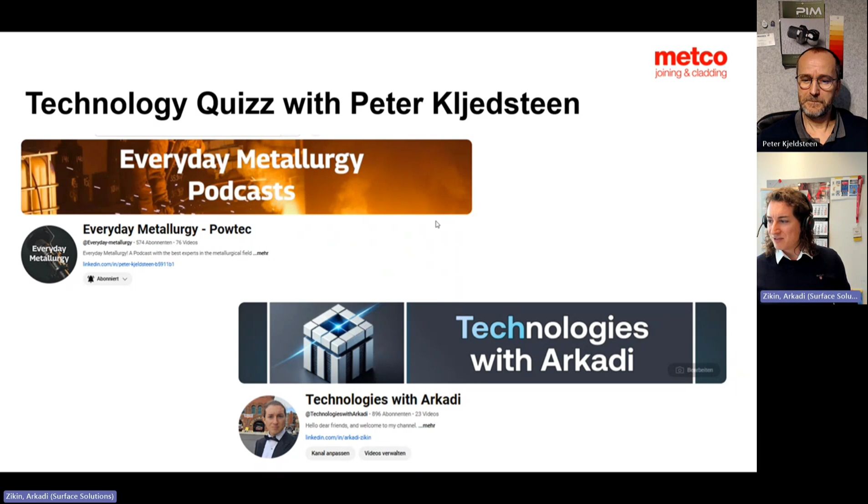That's why if I look at today's quiz, I want you to tell me: what is powder metallurgy? Yeah, that's a good one. Powder metallurgy started many years ago. It was the only way you could make products in alloys that had such a high melting temperature that you could not melt it. A classic example is materials made of tungsten - you're not able to melt tungsten products, so you have to produce it powder metallurgically and sinter it.

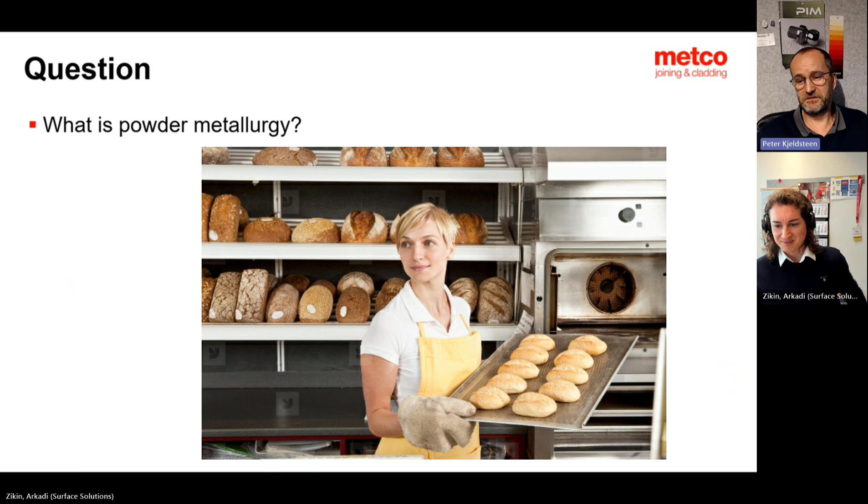In basic terms, I often use the picture of a bakery, because in a bakery you have the flour, and in a powder metal plant you have the metal flour. With that you can make different kinds of breads, and you can also make different kinds of metal components. So if you one day want to make stainless steel, you can do that. You can make traditional carbon steel, you can make different alloys - copper, aluminum - and some of these very special high temperature materials are very common, as well as electrical steel. And some of the funny things, magnets, are always made with powder metallurgy routes.

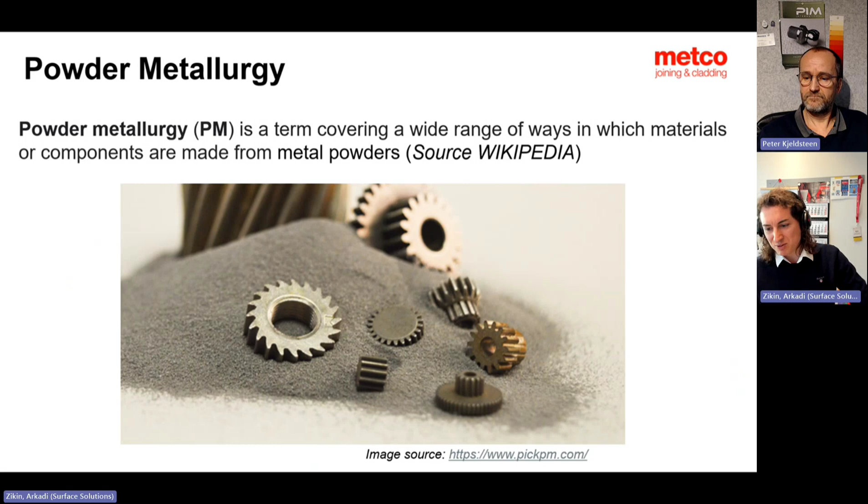Yes, because you improve the magnetic properties of materials by that. When I was preparing this for you, and honestly also trying to answer the question myself - what is powder metallurgy? - I haven't found anything simpler than a Wikipedia definition, which covers a wide range of ways in which materials or components are made from metal powders. So it's very simple, if not too deep a dive. There's also a picture from the internet showing that we have a powder, and then you have various components like gears and so on which you can produce using this technology.

Let's move forward, and I want to come back to your probably very young times. Can you name me the 4 main classical steps of every powder metallurgy process? Not going into powder injection molding, not going into additive manufacturing - what were the real classical first 4 steps? The manufacturing of the powder must be number one. Correct, so typically the powder is made - you melt it and you atomize it.

So that's the main way of making the powder. It can be water atomized or gas atomized primarily. There are also some advanced methods, but let's keep them out.

Then the next step is blending the powder, or mixing it. It could be mixed with a binder system, or mixed with a lubricant, or you can also make what you call blended elements. So take pure iron and add graphite, and when you sinter that, you have a carbon steel.

So after mixing, it's pressing. The compaction is a uniaxial compaction where you put the powder in a die and you have punches from top and bottom compacting it, and it can be more or less complex. It can be several levels of punches. So today there's a pretty large degree of freedom compared to just 20 years ago.

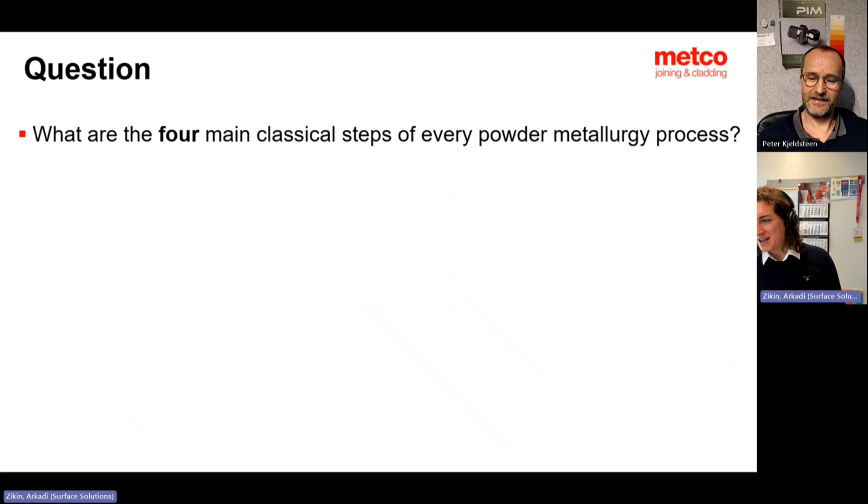Peter, I must say, applause. You're really an expert in powder metallurgy. You exactly mentioned all 4 main steps of classical powder metallurgy: powder preparation, not going into details on methods, primary atomization, then mixing and blending. You even described the difference between mixing and blending, which is great, and compacting, and of course sintering.

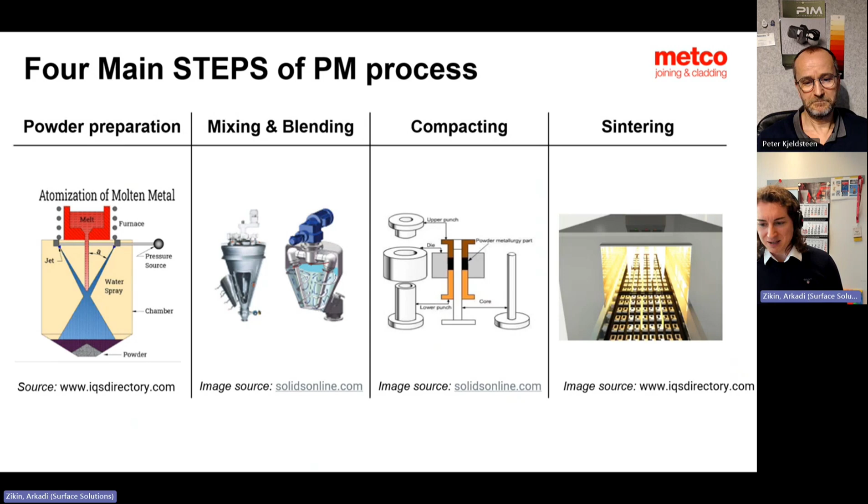Yes, and now we move to the next question. Can you name typical products made by this type of process?

Yes, what should I take? In the automotive industry, in the motors of a car, there are a lot of components. The camshaft - some of the parts for the camshafts are made in powder metallurgy, and they were some of the first, the old parts that were started making.

But the small teeth you showed on your first picture, that's also a standard. So for a clockwork in Switzerland, I am sure they use a lot of those in the watches. They do, yeah.

Because typically a product has to be a little complex, because it is not like when you machine, you remove material - here you build it up. So the more complex, the less waste you have. So it's typically an advantage to go powder metallurgy if we have complex shapes and where it will be difficult or costly to machine.

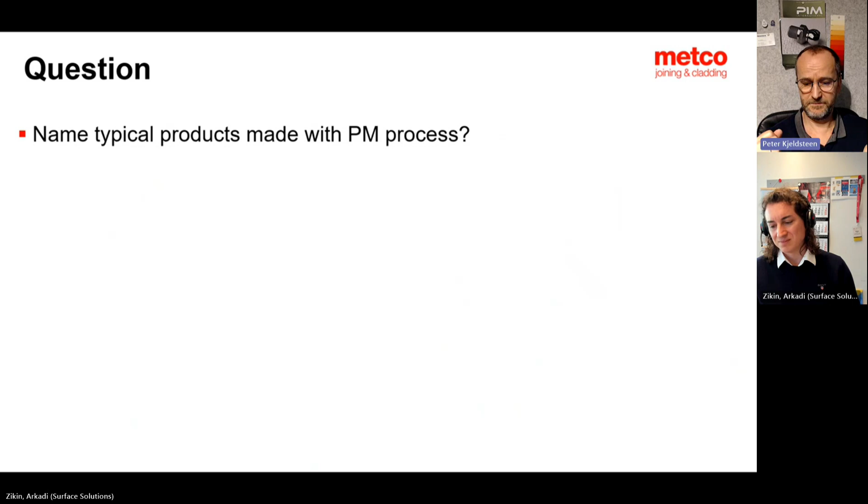Yeah, it's a very good summary. I was surprised when I was searching about numbers - still 80% of components made by powder metallurgy go to automotive, like an example, the transmission system of Ford.

And then at the end of the day, what I found very interesting is that the most expensive kitchen knives are made from high-speed steels made of powder metallurgy, because they get the highest hardness and actually extremely long lasting times, maintaining sharp edges.

And some of these knives are even made as Damascus design. So this is HIPed - hot isostatic pressed. You take powder into a big steel can, and you put that into a hot isostatic press where it's heated above 1,000 degrees and pressed with 1,000 bars. And if in your design you take two different alloys and position them in the powder shape, and you press it, then you have the look of a Damascus steel.

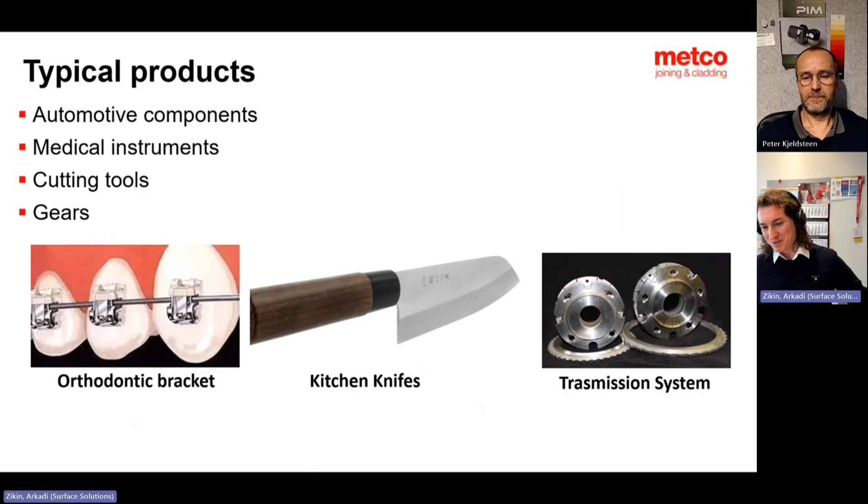So it's cheating Damascus, but it looks pretty nice. It looks very nice and has nice properties. I agree, yeah, so let's move.

I tried to make a copy of it myself. And successfully? Yes, I have it in my garage. Okay, I'm excited to see - probably next time you make a video to show your own creations.

So some fascinating facts - I chose 3 fascinating facts, like a challenge to you as an expert. So tell me, powder metallurgy is quite commonly considered a green process. What would you name as the efficiency percentage of powder metallurgy?

I agree on the green, and it is mainly because of a high efficiency. The powder usage is typically above 97%. There is some waste in running in, and there could be some scrap once in a while, but I would say typical efficiency is 97%.

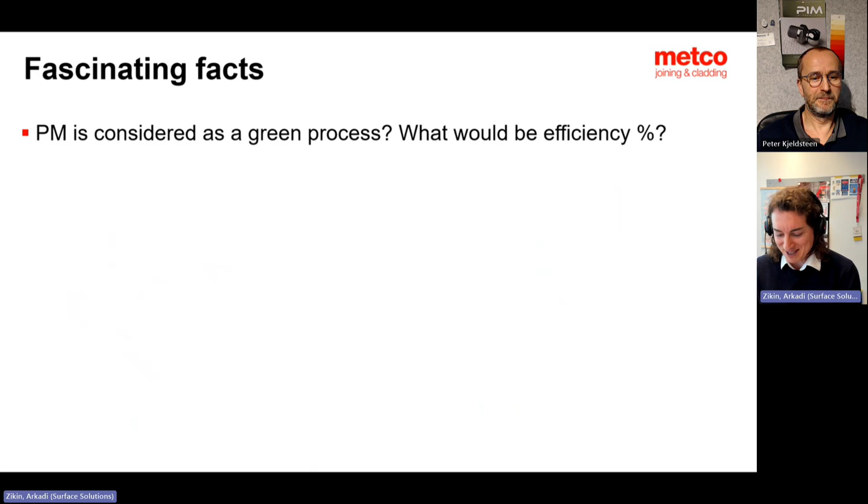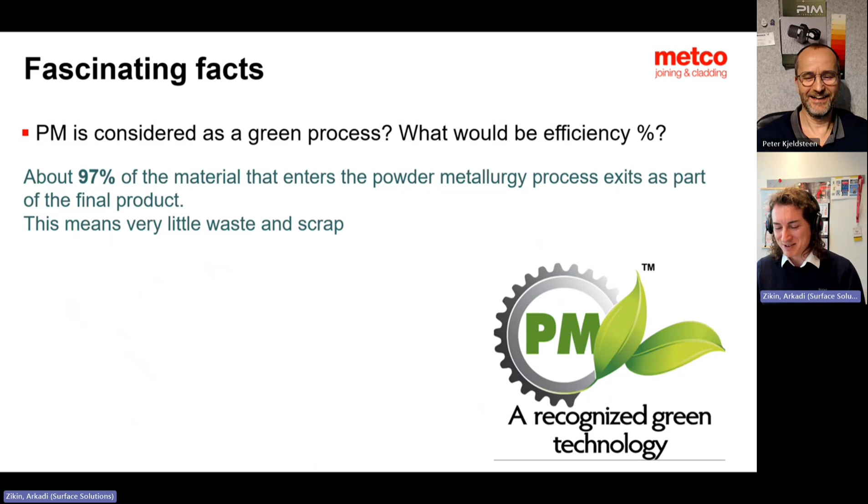Peter, I love and hate you at the same time, because you exactly hit the number. Yeah, so it's very clean. And also what people quite often forget, you almost don't need any post-machining, so your material removal rate is extremely low. Yeah, maybe I wrote that number. I have a reference for this. Maybe somebody was listening to you.

So another one: can a compact be considered as a final product? In classical powder metallurgy, you told us there are 4 steps: atomization, mixing and blending. Then you make a compact by pressing, and optically it might look very beautiful, like a real part. But can it be considered as a final product? No, we call it a green part.

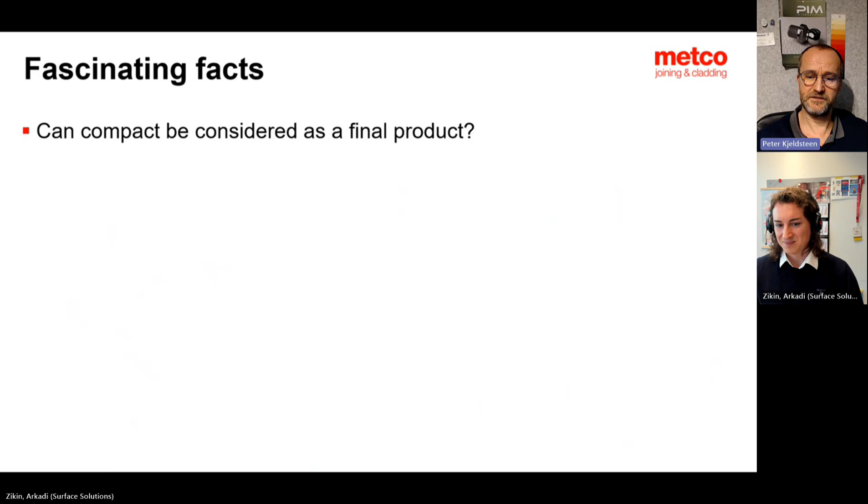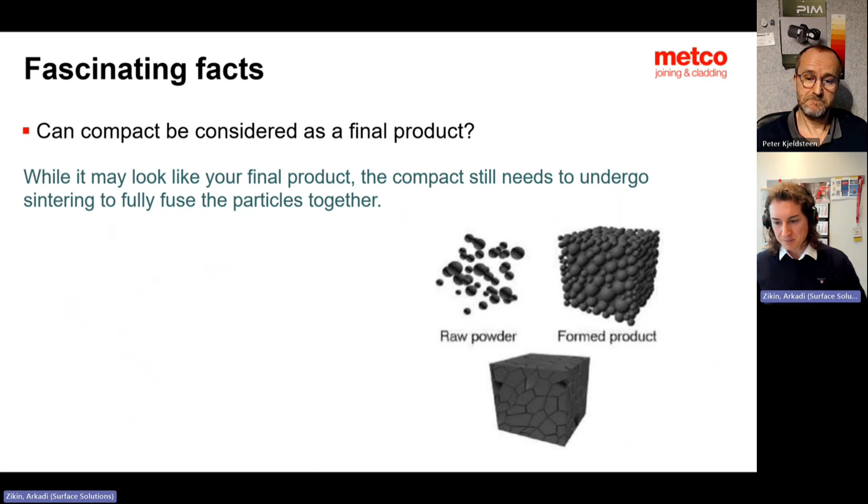And the strength of that is typically below 10 megapascal. It's just strong enough to move it from the press to the furnace, but you can easily squeeze it with your hands. So it might look like a final product, but it's actually not dense. I like this picture, which shows an example between raw powder and formed product. You basically densify it, but at the end of the day, you need a sintering process to get a final dense quality product.

And then we come to sintering. You can say furthermore, it typically doesn't have the right size, because during sintering it also shrinks. So a typical shrinkage rate is 2 to 4%. Therefore, we make it typically in oversize.

I remember calculations from my master classes for powder metallurgy, finding the shrinkage rate of titanium carbides and some kind of binder. Crazy stuff. Do you think the shrinkage is linear?

No, it is not. We had a project some years ago with Trento University where we tried to design algorithms to foresee shrinkage as a function of geometry, but we couldn't develop or define one single algorithm. There were several algorithms depending on wall thickness, material composition, height, or difference in wall thicknesses, and even the sintering cycles. Yeah, it's pretty difficult.

So therefore, typically in metal powder factories, some of the important guys are the old guys who have been making the drawing for the tools for more than 20 years. They are the real experts because they have the experience, and they're not able to tell you why. That's when you really become an expert. I just feel it, yeah, exactly, smell it.

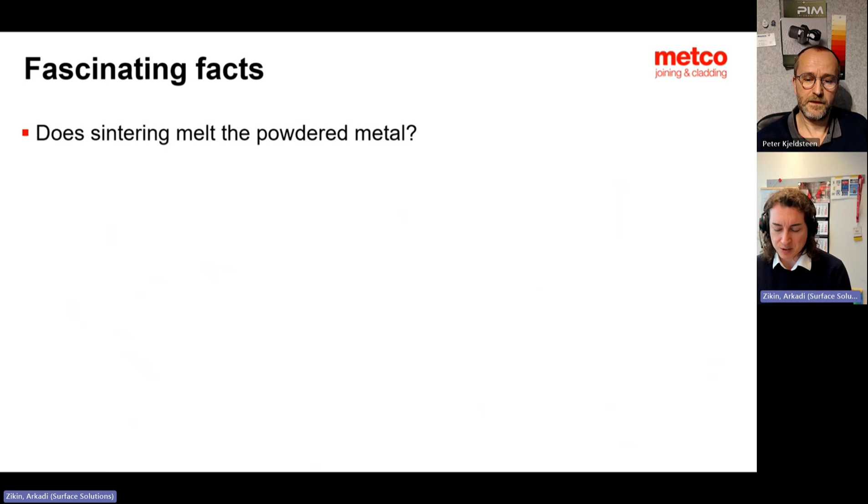So therefore, you typically sinter in a semi-liquid state. You have up to 20% liquid phase in the beginning of the sintering. Then the shrinkage rate is a lot higher - you can have shrinkage rate up to 20%. That's correct, so it's pretty difficult to define the final shape. But by doing that, you can totally remove the porosities you typically have in standard sintering. That's true, but also there you quite commonly move now to hot isostatic pressing nowadays.

However, the question you answered, you made an example with a snowball. Like in powder metallurgy, probably what's most important to say is that the sintering process is kind of an art of heat treatment. We heat up below the melting temperature, keep that to a certain extent and time, because you need time to get the processes to happen, and then you get the beneficial dense properties. So it's like an ice cube inside a cold water glass - it's melting, but it's not really melting.

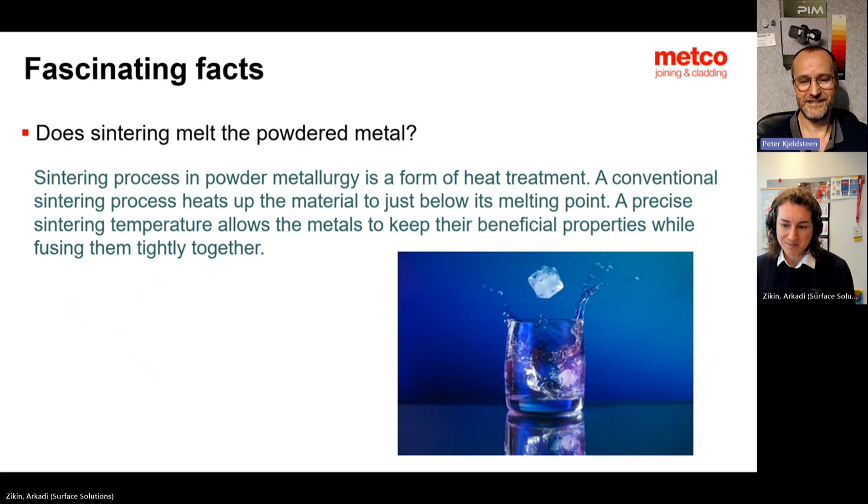And this is a fun fact which I liked. Peter, this now brings me to a quiz technology. So we introduced to people that's the powder metallurgy.

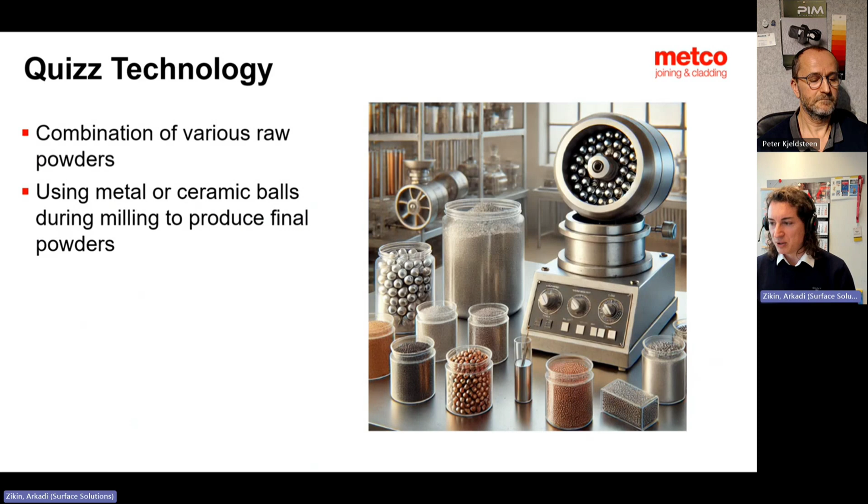Now I will explain something which I'd like you to find out what I'm talking about. Maybe it will be easy for you, but at the end of the day, powder metallurgy, as you mentioned, is also used for combination of various raw powder materials, which you bring together and get some benefits. In certain processes, you might use ceramic or hard metal or steel balls during the blending or mixing stage.

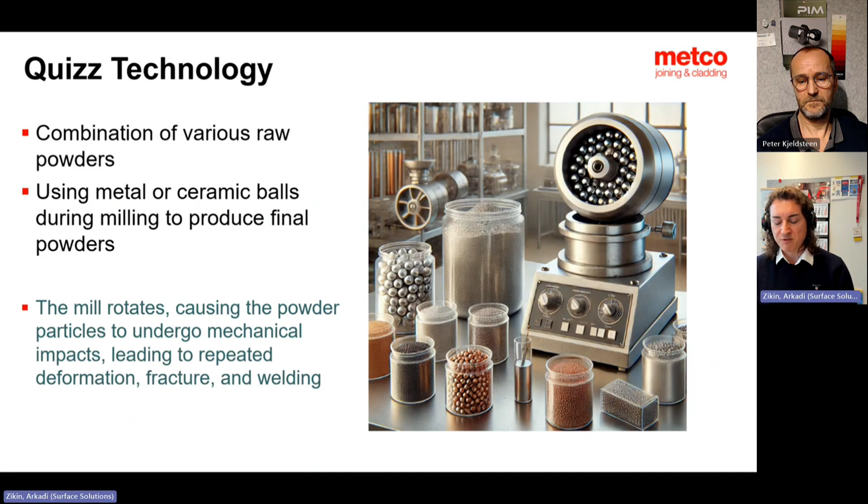Yes, because during this, when you rotate, the balls undergo mechanical impacts on the powder particles. They deform them, they fracture them, but they also cause welding, which is an important phenomenon of this process.

So now I go to something from my early age, where I first ever took this process seriously. As a young, ambitious person, I started to work on titanium carbide because it has lower density compared to tungsten carbide. It's easy to get, but titanium carbide is also not the cheapest material on the market.

Nowadays we talk about laser cladding, brake disc applications - titanium carbide is almost a standard choice by companies. When I was young, 15, 20 years ago, as a young student, it was not the case, and we were looking at titanium dioxide because it's extremely cheap and widely available.

So then we tried a method - which you will tell me probably later - where we mix titanium dioxide with carbon powders in precise proportions. We bring it to a kind of tumbler, and with the balls, we use titanium carbide balls because they would remove a certain amount of contamination, since titanium carbide balls actually build up titanium carbide even if they contaminate and wear. Then we perform this high energy ball milling process, causing reactions over certain time with these energetic cycles, which theoretically should lead to formation of titanium carbide out of titanium dioxide.

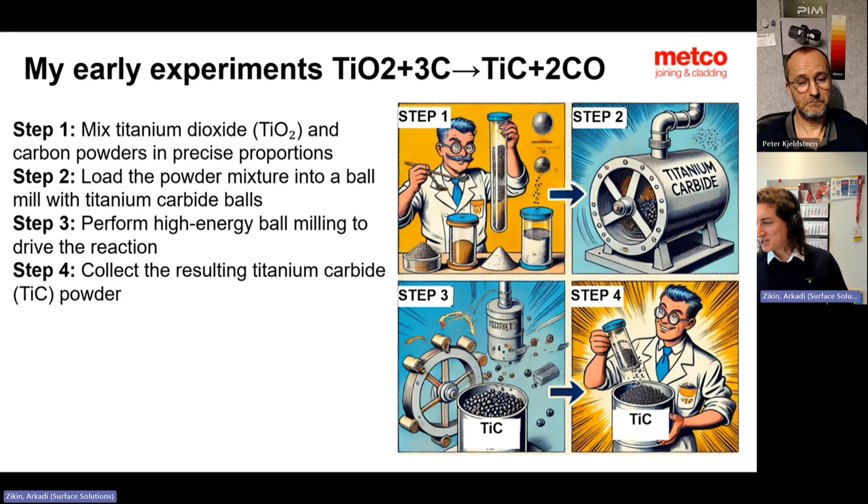What was the motivation behind this? I told you already in a couple of words - it's widely available, titanium dioxide. You could have a USP because you'd be the first one to do something in other ways than people do. It's also environmentally friendly. And most important, you can get customized microstructures - you can play with titanium carbide grades and grains and particle sizes and properties. You could add some alloying elements and get really interesting results out of that.

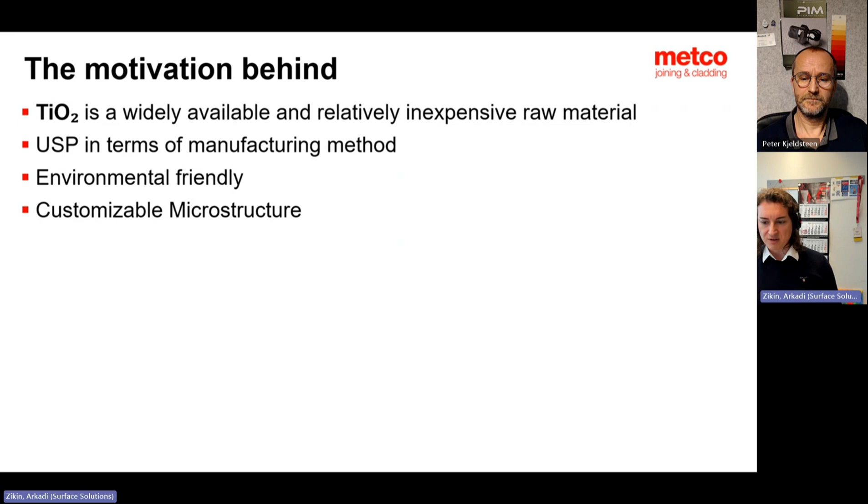Of course, since that time, technology has moved forward and you have different and various ways to produce it, but at that time it was interesting.

The challenges we faced were that when titanium dioxide reacts with carbon, it requires a high energy level and intense milling. To form this cycle and realize that you can get all the titanium dioxide transferred to titanium carbide was not easy. You can get some contamination, because wear happens not only on the balls, but can also happen on the housing of the rotation tumbler. So you still can get some particles you would not wish to have there because of aggressive milling.

But the main obstacle at that time, and unfortunately probably remains for this method, is industrial scale-up. If somebody says I need 100 kg of titanium carbide, this would probably be a very nice method. But if somebody says we have an application where we need 100 tons of powder produced this way, this technology unfortunately failed to achieve industrialization. That's why it's not really widely used for high volume powder production.

So, Peter, we step to a question - what am I talking about? The product or the process? The process, the technology behind it. Is it called ball milling? No, it uses ball milling, but there's a clear scientific name for this technology. Maybe you know it.

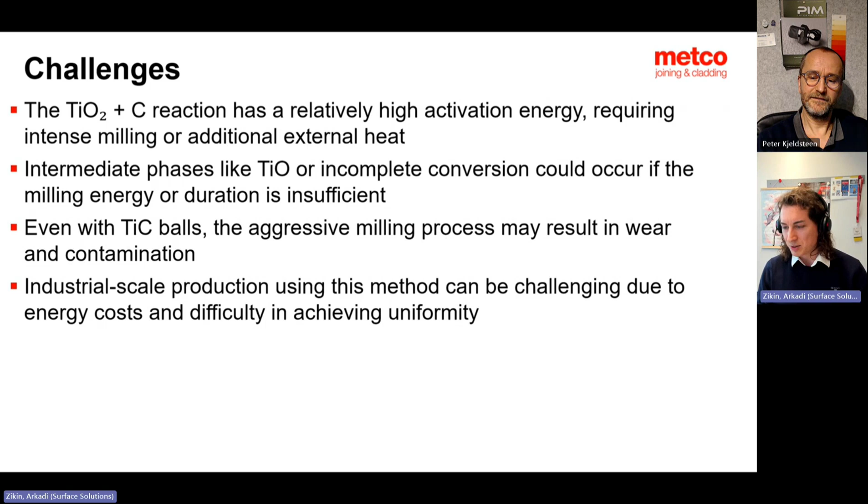So anyway, Peter, the process is called mechanical alloying. It's a solid state powder processing technology which helps you produce alloy and composite materials not achievable with conventional casting methods. The core of it is repeated deformation which causes fracturing of powder particles and a cold welding process of those particles through high energy ball milling. You rotate it extremely fast and the balls fall down, causing fracturing, which is still quite widely used nowadays in nanostructured and nano-reinforced materials.

So basically you alloy powders not during the sintering stage, but by cold welding—that's how you make the transformation. That's also how you transform titanium dioxide to titanium carbide, with this permanent fracturing causing carbon to react with titanium.

As I said, in my opinion the biggest problem of this technology is scalability. Yeah, and it's costly. Okay, I'm typically on that side of it because I'm the guy purchasing the powders.

That's true. However, for some prototyping—and I know the latest studies all go toward these high entropy alloys, something you can't get through conventional methods by blending powders—it's still quite commonly used, at least from what I see in papers discussing mechanical alloying. Maybe some listeners who are experts in mechanical alloying can share their comments and perspective on this technology. For me, unfortunately, it's something that remained at a scientific level.

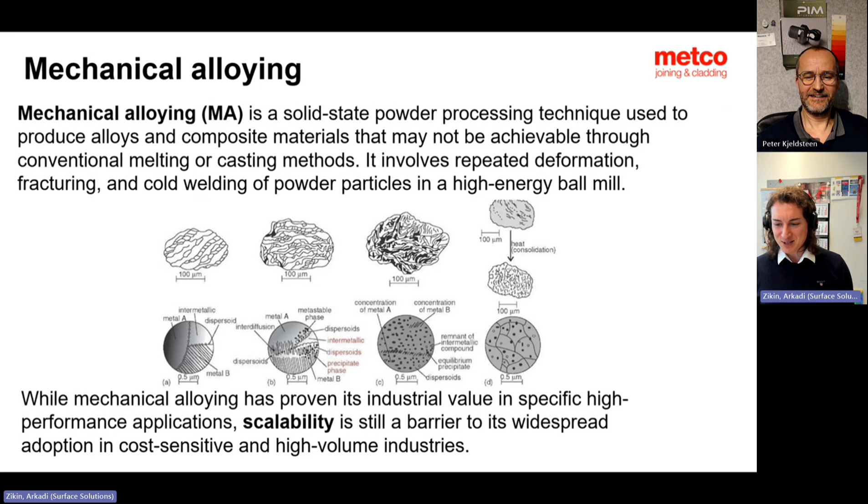And now it's your time to challenge me. Yeah, thank you.